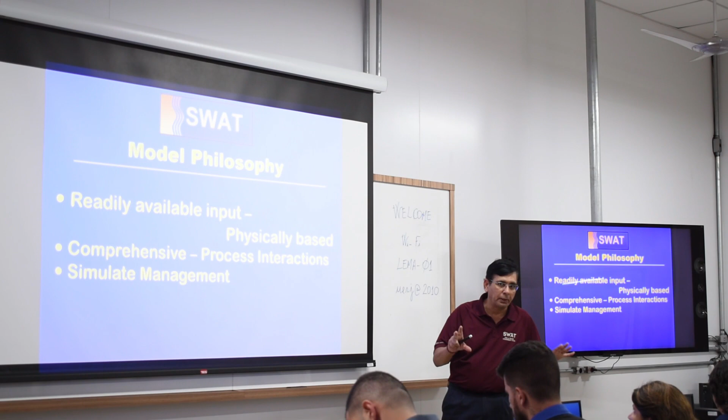Our model is also physically based, meaning it's spatially explicit. Your landscape, later in the slide I'll show you how you can divide your landscape into land management units. So it is spatially explicit on the landscape to capture the rainfall, runoff, vegetation, and soil processes.

The main takeaway message from this presentation today is how comprehensive the SWAT model is, meaning how you could potentially look at various aspects of land management and the interaction of land management with the natural processes happening in the real world, and the simulation of alternative management, meaning simulation of scenarios. How can you run different scenarios to look at 'what if'? What happens if I change my land use from agriculture to pasture, or pasture to forest, or forest to urban? How does that make an impact on water quantity and quality, for example?

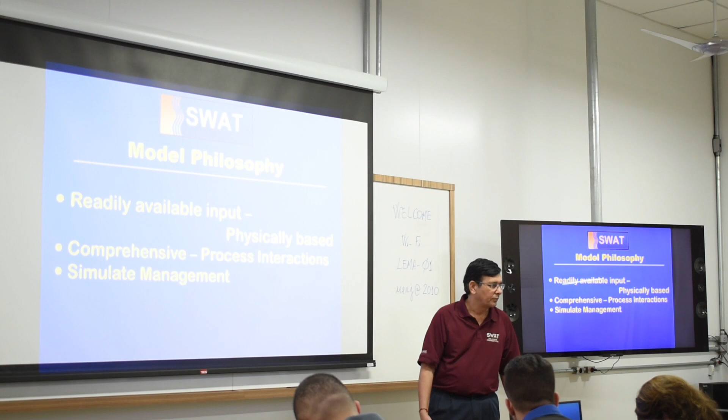So developing a model such as SWAT is not just to prove the model works. Yes, you do need to do that to gain confidence in your model, but the main reason you develop a model is to run alternative scenarios. For example, if Anna wants to put a monitoring station, where is the best place to put it? If you want to put a meteorological station, where is the best place for that? Where is the data gap, for example?

One of the PhD students in Belgium used the SWAT model and advised the government of Belgium on where to collect data for pesticides. Their interest is water quality, drinking water quality. How good is the quality of your water, measured by pesticide levels in the river, so they can identify health risks.

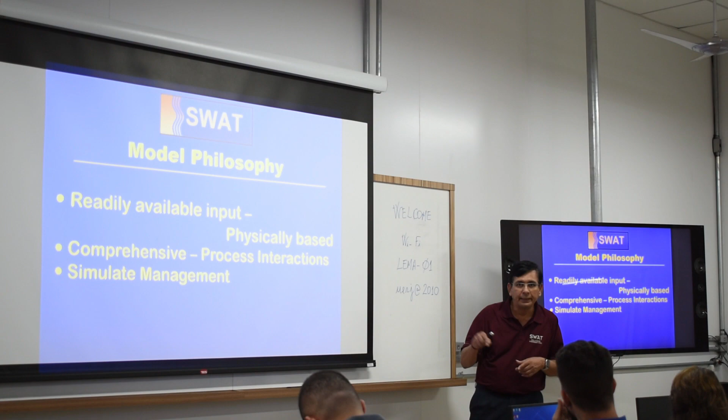To do that, pesticide data is very expensive to collect and analyze, each sample costs more than $100, so there's only so many samples you can collect. She used the model to identify the locations where you can collect data, how many times you have to collect data, when to collect it, where to collect it, and what to collect. So the model can be useful in this manner, to set up an experiment so that you can look at the spatial and temporal variability and try to capture that, and be able to simulate land management based on the impact of what's happening.

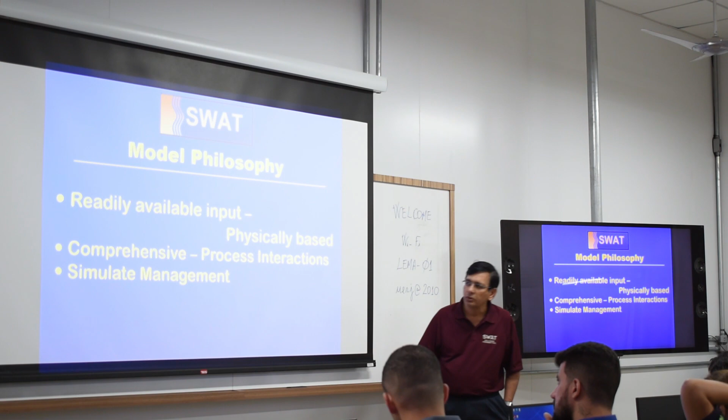Because the land is changing constantly, it's not constant. Your topography may be kind of constant, your soils kind of constant, right? It's not changing unless you change the topsoil or things like that. But your weather is changing, your temperature, your precipitation events will change. Your land use will change actually. So the main driver for any land management is going to be weather and land use. Your elevation and soils are not that dynamic. They may change once in 50 years or once in 20 years, not from year to year. Whereas weather and land use will change almost on a yearly basis. Land use maybe once in few years, maybe once in 3 or 5 years, but weather every year changes. So that's what we are trying to capture: the variability of your landscape and how that might impact the quantity and quality of your water.

Okay. Stop me anytime if you have any questions, okay, please.

One of the fundamental philosophies is that we want to develop the model with a simple understanding. We don't understand everything what's going on actually. The real world is very complex, right? So what is a model? Model is the simplicity of abstraction of reality. We are trying to capture the real world processes through mathematical formula in a computer simulation model. But we may not know everything what's going on. Mother nature is very complex, right? So we try to capture the best of what we understand and we make assumptions.

We make unknowns, right? Like constants and coefficients and things like that to represent the process, but that doesn't mean the model is perfect. Model is always an opportunity to improve as we gain new knowledge. So we try to keep it as simple as possible, but still follow the law of physics and chemistry. We can't change the law of physics and chemistry to make simulation models, so we still use those in our process.

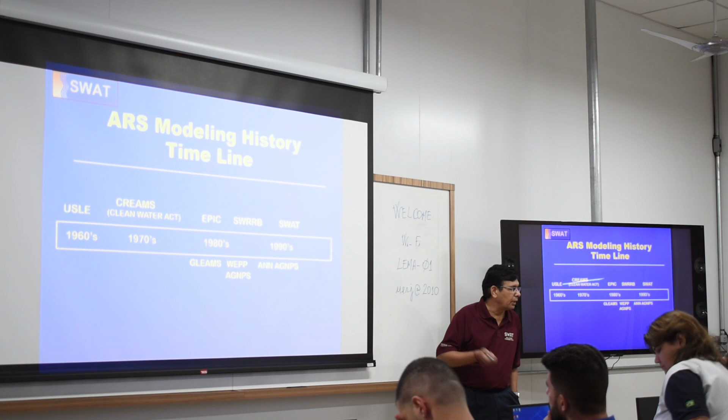It's based on a law that was passed in the US called the Clean Water Act, on how to protect your water resources. So they realized around 1970, 72 to be precise, that we need to think about the quality of the water, more than quantity of the water, because you can have all the quantity in the world, but if the quality is not good, that water is not going to be good either. The amount of resources you have to spend to clean that water is not going to be worth it at the end of the day when you need to use that water.

So protecting your quality of the water at the source - source meaning where it is produced. When there is a rain, and that rain is going to produce runoff, at that source itself you have to protect your quality of the water. If you don't protect it there, it's not going to be that great when it comes to the river or the lakes or the ocean and things like that.

Then in the 1980s, we had a model called EPIC. And then in the 1980s, we had SWRRB, and then eventually this converted into SWAT. Even today, this model developed in the 1980s, EPIC, is the most used model in the world actually. If you look at every model in the world, this is the most used model in the world.

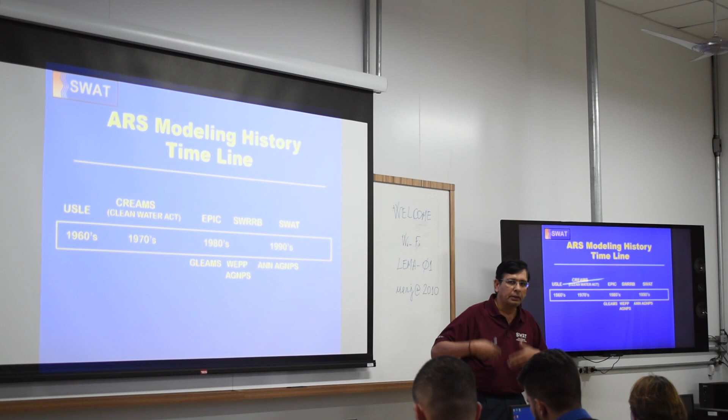The data is evolving. As we find something, there's a data gap, a knowledge gap. So we go back to the drawing board, go back to them, and say we need this data, or we need to collect more data for a particular time period of the year, because that's a rainy season or non-rainy season. As we ask for more data, they go collect it, then we go back to modeling, develop the model, apply it, and answer the question. It's been continuously going on for the last 30-plus years.

So modeling is about what you want from the model, what questions you're trying to answer, and whether you have enough data to answer that question. Those are the things that take time and resources to develop a model.

We also have a few other models like these shown at the bottom. Some of them no longer exist. One of the sad stories in model development is when the model developer retires or passes away, the model dies with them. If there's no caretaker, no big organization behind it, normally it doesn't survive. For example, Gleams—when the author died, the model didn't survive either.

But we took the best science out of Gleams and incorporated it into both EPIC and SWAT. Gleams is a pesticide model, developed for pesticide movement. So we took the pesticide component from Gleams and incorporated it into our models. We take the best of each model where available and integrate it with our model, so when those models become obsolete, our models can still carry on.

So one of the things we're working on is making sure we have a succession plan, meaning when we retire or go away, there will be somebody else to take care of it. We started this plan 10 years ago. If you know someone is going to retire 10 years ahead, you start planning then. We now have somebody taking care of the EPIC model, and we're working on our succession plan between myself and Dr. Jeff Arnold.

Jeff and I are the two main people working with the SWAT model. Jeff is planning on retiring in another 5 years, and I may retire in 10 years. That means we need to have somebody come and take care of that. So we are working on that transition plan right now.

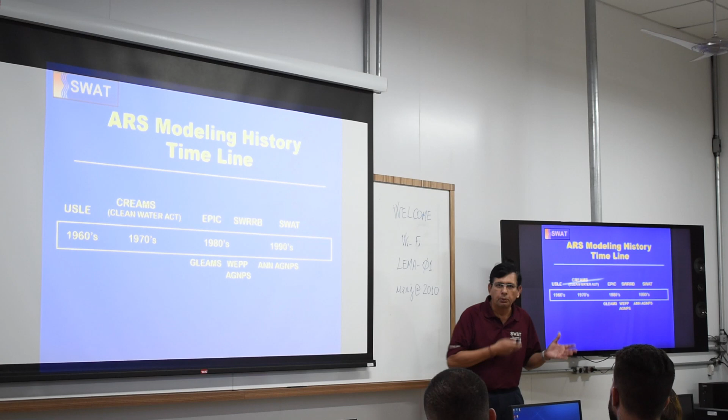These are the 4 models we currently manage, maintain, and actively research today. EPIC, which is a field scale model, and Almanac, also a field scale model. Almanac is mostly a research model, not a practical tool—researchers use it to develop parameters for other models. It's much more primitive; you need a lot of field data to operate it, so it's mostly used by scientists, not practitioners.

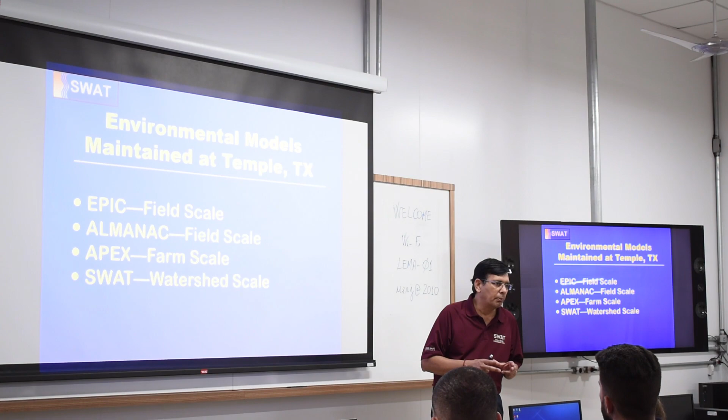Then there's APEX, a farm scale or micro-catchment model. When I say micro-catchment, I mean something like 5 to 10 square kilometers, a very small catchment. If you want to model that, you can use APEX. But APEX requires a lot of data—it's much more data intensive than SWAT because you're capturing field by field within that micro-catchment, so you need more data, typically from experimental watersheds.

In that particular situation, you should be able to use APEX. The only thing is you can't scale it up to a very, very large scale, like a river basin, for example.

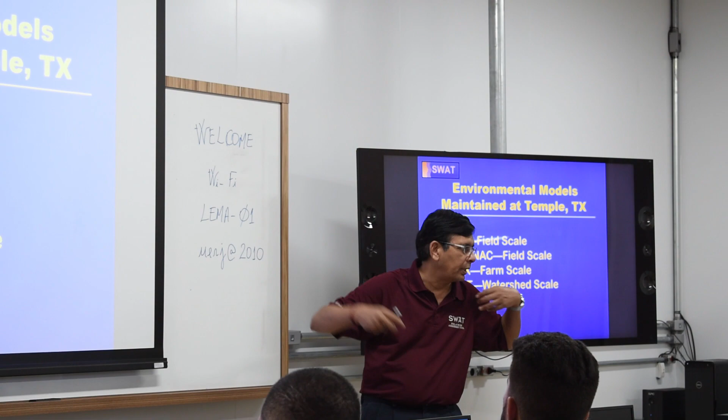And finally, the SWAT. SWAT is a watershed scale or river basin scale model. Actually, you can model all the way from a few hundred acres to thousands and thousands of square kilometers.

That doesn't mean it is less accurate or more accurate at any particular scale. The scale is dependent on your quality of data. If your quality of data is really, really good, you can capture a very small area all the way to thousands of square kilometers.

For example, if you have a 1,000 square kilometer watershed and you have, let's say, about 2,000 farmers managing land, everybody is going to manage differently. So if you have a sugarcane field, not everybody is going to plant on the same day, not everybody is going to apply the same amount of fertilizer, or not everybody is going to harvest on the same day.

Knowing that detail, not only that, if you are simulating for 30 years of time period, we don't know what happened 30 or 25 years ago. How did they manage the land? How are they managing it today? So that kind of detailed information is very, very difficult to obtain.

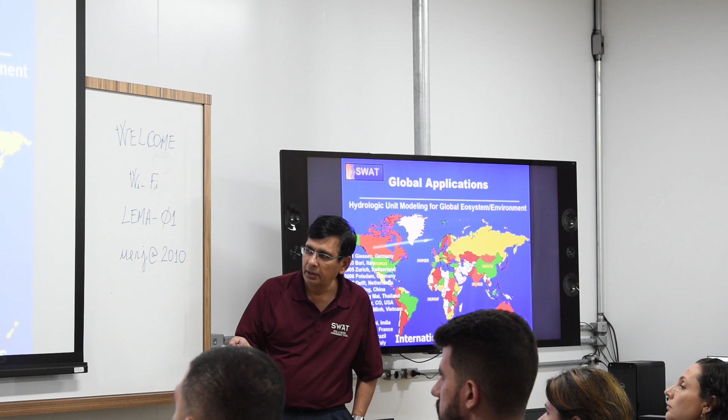One of the reasons this model, the SWAT model, is very popular is because of the conferences and meetings that we conduct, like workshops and things we conduct. We started our first conference in 2001 in Germany, and then we used to do it every other year in Europe, but now we are doing it every year. Now we are doing 2 conferences per year, actually.

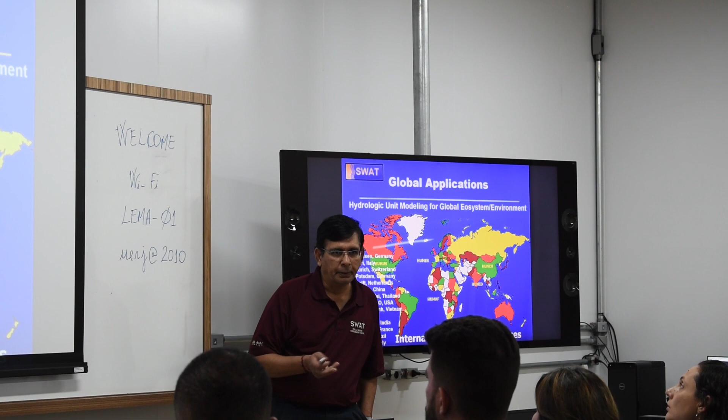SWAT is a daily time step model, meaning it takes your daily precipitation and looks at your land use, the soil, and the topography to estimate how much runoff, how much pollutant, or how much pollution from those runoff is attached to that water.

We also have a sub-daily or hourly simulation model. For that, you need an hourly precipitation data set. You can't take the daily rainfall data and try to run it for hourly, because we don't know which hour the rain really happened. Let's say you had rain yesterday, the rain happened from 6 to 7 o'clock in the morning. We won't know that if you don't capture the time of the rain, the intensity of the rain, whether you had 30 millimeters or 50 millimeters in half an hour, or 30 millimeters or 50 millimeters over 2 hours. That changes the intensity.

The intensity is what's going to change in terms of runoff, soil saturation, and so forth. You can run the model at daily or sub-daily time step, and for literally any number of years. Currently, we have data for the past 100 years and the next 100 years using climate change projections, so you could potentially run the model for 200 years today.

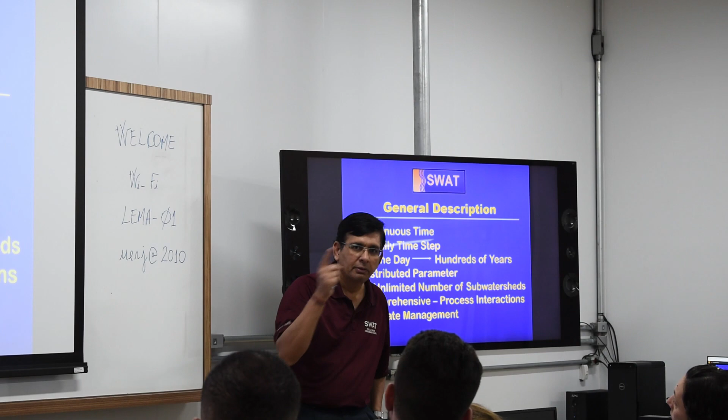So not applying fertilizer as an input into the model - that one input could cause a chain reaction that impacts your model output in various ways. That's where process interaction comes in. It interacts with different processes, trying to capture the chain reaction of consequences of action. If you take a certain action, you're going to see consequences, right? You decided not to carry an umbrella, then if it rains, you're going to get wet - that's an action. It's the same thing - there's a reaction to every action here.

All those reactions get fed back into the model, so that if there's a mistake in the model input, it's going to be reflected and shown in various places within the model output. Does that make sense? And finally, the simulation of alternative management is key here, meaning running scenarios.

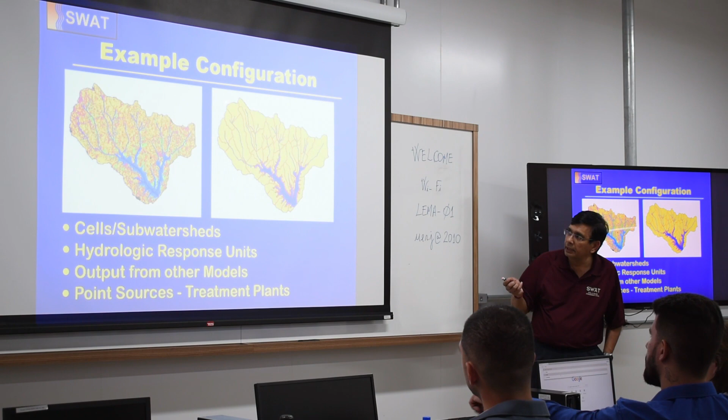You can also have sub-watersheds based on topography. This red line you see here is a sub-basin. That means any rainfall within this red area all has to go through this river to this outlet only. In other words, rain that falls here cannot go another way. It has to follow the path based on topography.

Then we take the sub-watersheds, or the cell, and divide that by what we call the hydrologic response unit, or HRU. HRU is a unique combination of land use, soil, and slope. So we take the GIS layers, the land use layer, the soil layer, and the slope layer, overlay all three maps, and look at what is the unique combination of each pixel, then combine them to come up with a hydrological response unit.

Meaning whatever happens in that parcel, you are going to have the same response, because it's the same soil, same land, same topography. I'll describe this in a bit more detail in the next slide.

The hydrologic response unit is the smallest unit in the SWAT model, meaning it's the basic building block. If you're putting together a puzzle, you need a basic small unit, right? So HRU - you put together a bunch of these HRUs and that becomes a watershed. A group of HRUs within a subbasin becomes a subbasin, and a group of subbasins becomes a watershed.

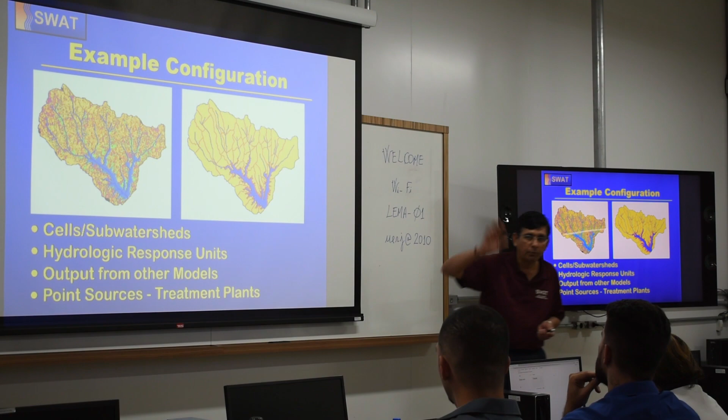This is more important where, for example, you want to model the state of Sao Paulo and water is coming from Brasilia or Minas Gerais or other places. Along the border, you don't want to model what's happening in that state - you just want to drop an ANA station and use that as a boundary condition. Then you can model only what you want, or model below a lake, knowing how much water is released from the lake as the boundary condition, and model downstream of the lake rather than upstream. So you can customize within the watershed, starting and stopping anywhere to model with SWAT, as long as you establish the boundary conditions. Does that make sense?

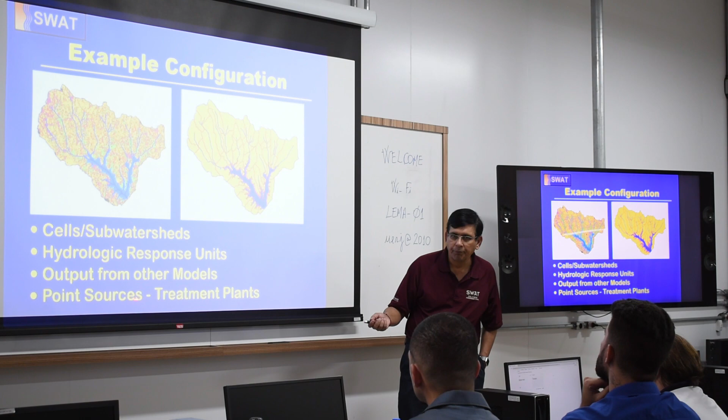SWAT is not only a non-point source diffuse pollution model, it can also handle point sources. What is a point source? It means municipality or industry wastewater treatment. If a city is putting out pollution and you have wastewater coming from that, you can incorporate that in the model - anything that gets directly discharged into the river, this blue line you see here, by a city, municipality, industry, or mining. So the model handles both non-point and point sources.

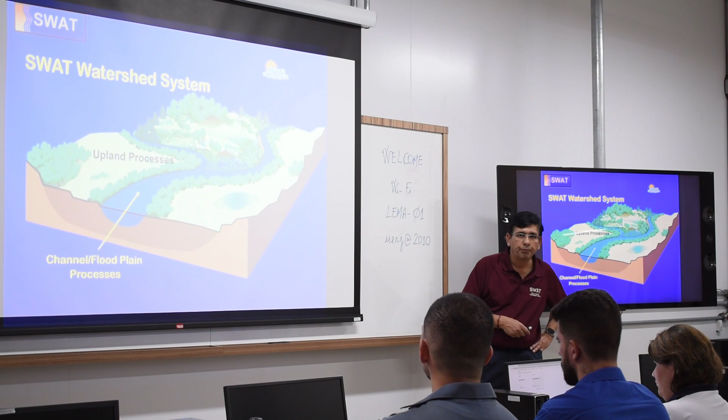So HRUs are virtual. But HRUs from one sub-basin to another sub-basin are 2 separate ones. Even though the same land use, same soil, and same slope occur in this sub-basin and in another sub-basin, there will be 2 separate HRUs.

But within that sub-basin, they will be combined. Even though they are 2 separate parcels, 2 separate land units, they will be combined as one for simulation purposes. Does that make sense?

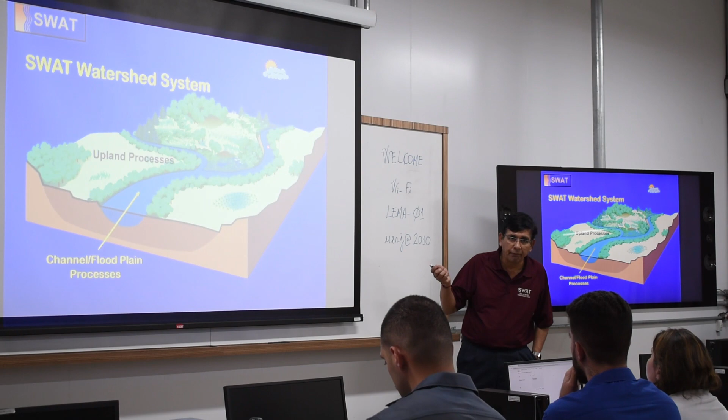Once all the simulations are conducted by HRU, those outputs dump into the river and the river routing process takes place. And the point source can be added at that time.

So just to explain this HRU concept, let me go through one more example. Let's say this is a watershed, and this watershed has got about 20 sub-watersheds, 1, 2, 3, 4, and so on, all the way to 20.

Let's take one sub-basin, sub-basin number 18. In sub-basin 18, 28% is rangeland on a sandy soil, 51% is pasture land on a silty soil, 16% is forest on a sandy soil, and 4% is agriculture on a silty soil.

I kept it very simple, meaning one land use and one soil. You could have rangeland on 10 different soils, and the GIS will automatically capture that for you.

So they can be in different slope. I'm assuming they are all in one slope here, just to give you a simple illustration, a simple example.

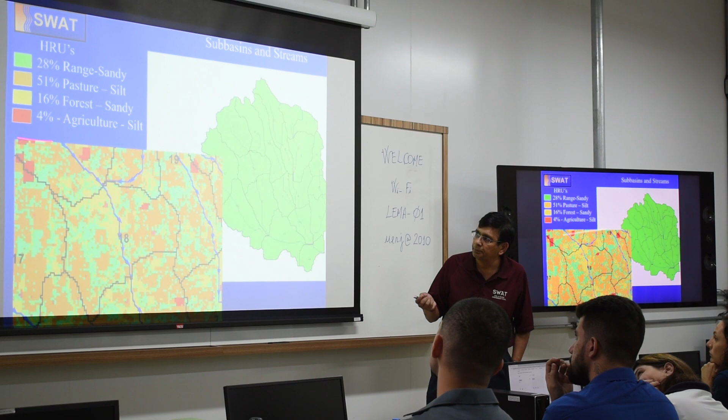So let's just focus on the forest, which is yellow in color here. If I just look at the forest land, these are all the forest lands in sub-basin number 18, and all of it is in the same soil, same slope. So as far as SWAT is concerned, it is one HRU.

Regardless of whether that forest is here or next to the river, it's the same. Within that sub-basin, they are all simulated as one HRU. That means in the output, I can give you only one output for forest. I can't tell you the amount of erosion here versus there, because they are all simulated as one HRU.

But we know that is not true, right? Some forests are managed, some are not managed - natural forest and plantation forest. In plantation forest, you harvest every 15 or 20 years.

Let's say you are planting eucalyptus - every 7 years you harvest it. The natural forest you do not harvest. So if I say I want to harvest my forest, it's going to harvest everything here because they are all in one HRU. There is no differentiation.

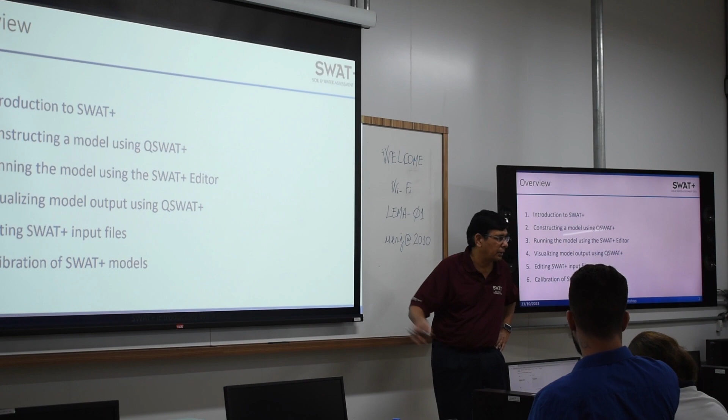All of this stuff, we have literature, documentation, manuals, and things of that nature. And we may have videos that we went through all of them, so if you are interested, we can share that with you.

So again, SWAT is nothing but a model for a small watershed to a river basin, to simulate the quantity and quality of surface and groundwater, to predict environmental impact on land management and climate. That's in a nutshell what SWAT is all about. It runs on a daily time step, and it's got a comprehensive simulation of landscape process and in-stream process.

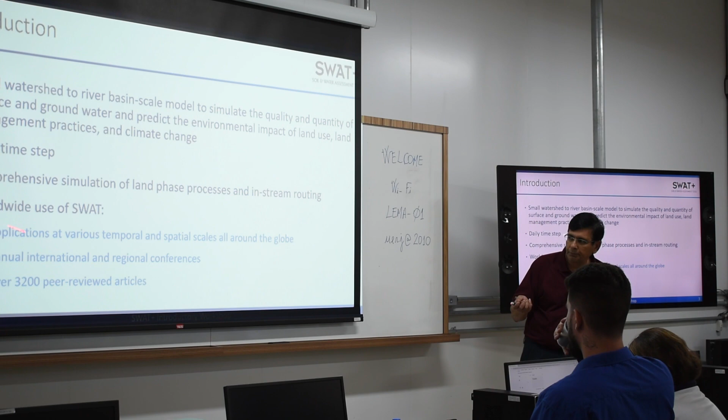It's one of the largest used watershed models around the world today. We just crossed, I know this is an old slide, 6,000 peer-reviewed publications. If you look at another model in the same family, like other watershed models, you may be looking at maybe 200 papers at most. Whereas SWAT, we have crossed 6,000 peer-reviewed publications.

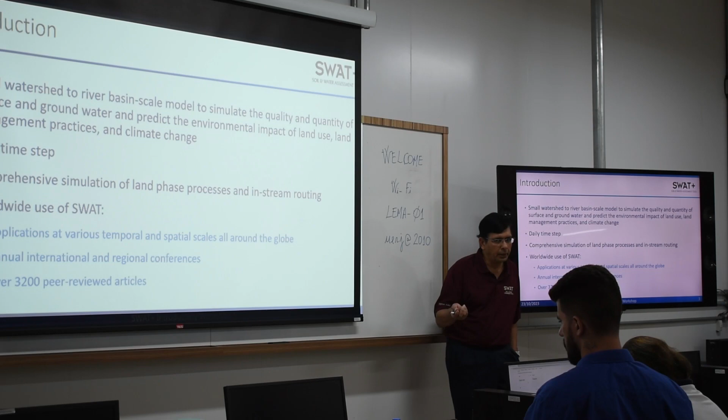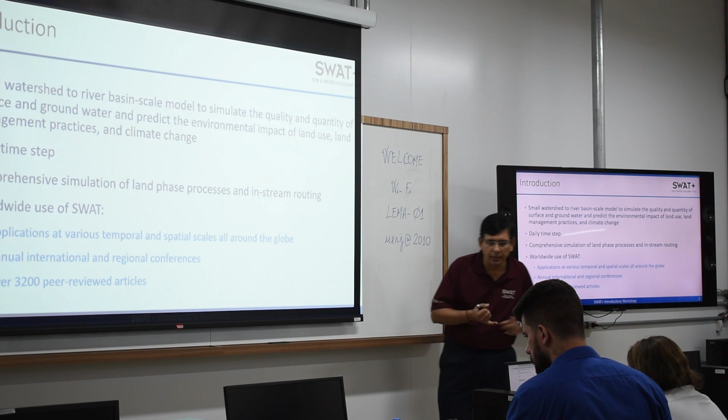And we have published in more than 400 different journals. The model has been published all the way from social science to economists, to environmentalists, ecologists - you name it, it's been used in so many different disciplines. That's one nice thing about SWAT: it brings in different disciplines, all the way from soil science, soil chemistry, soil physics, to plant agronomy, plant pathology, pesticides and things like that. And then civil engineering topics like hydrology, hydraulics, dam operations, dam management, energy management. So it definitely brings multiple disciplines all together in one model.

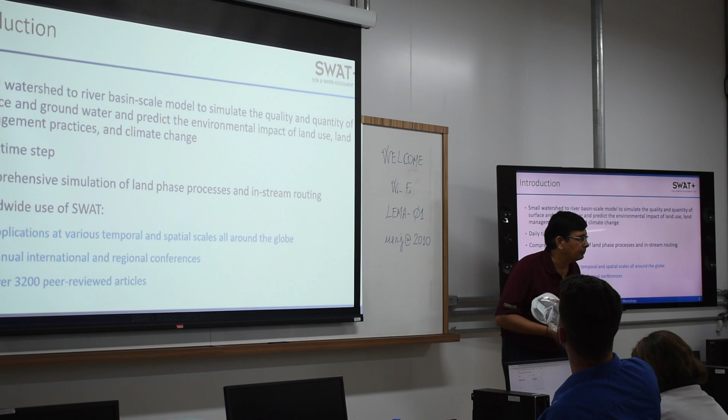And we know not any one person can master all this stuff. That's why a model like SWAT is really a team model with different disciplines, different backgrounds. We all come together and work together to solve the problem. And we have also estimated there are close to about 8,000 masters and PhD students using this model worldwide every year to solve a problem or understand a problem.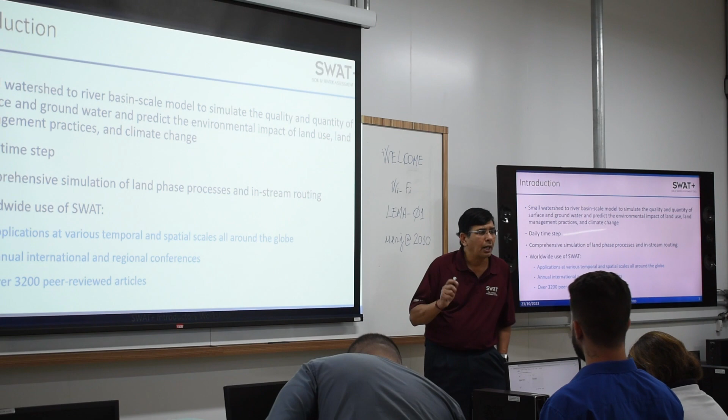That's why we have this 6,000 peer-reviewed publications - and I'm talking about 6,000 only in English journals. I know you all publish in a lot of Portuguese journals, Spanish journals and other journals. If you start taking Chinese journals into account, then that number has exceeded more than 10,000 by now.

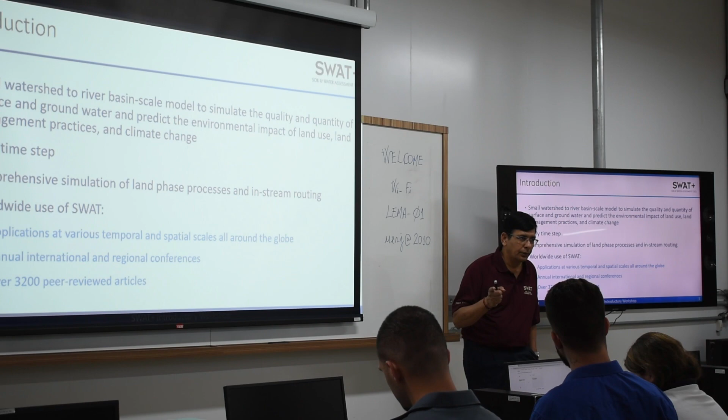We do have a review paper published by Danielle, and she has collected all the data - not only the peer reviewed publications, but all the masters and PhD dissertations - and documented that in the paper. That paper is available on the SWAT website, and you'll be able to go there and take a look at that, and actually see what's happening inside Brazil, for example.

So just to give you an overview, over the last 30 to 40 years, the GLEAMS which I told you about - the pesticide component - the CREAMS is the rainfall runoff model, and the EPIC is the crop growth model. So we combine all those three different components. That's what we're calling now SWAT. SWAT is a landscape process model, and it has both the routing and the in-stream water quality component called Qual2E embedded in it.

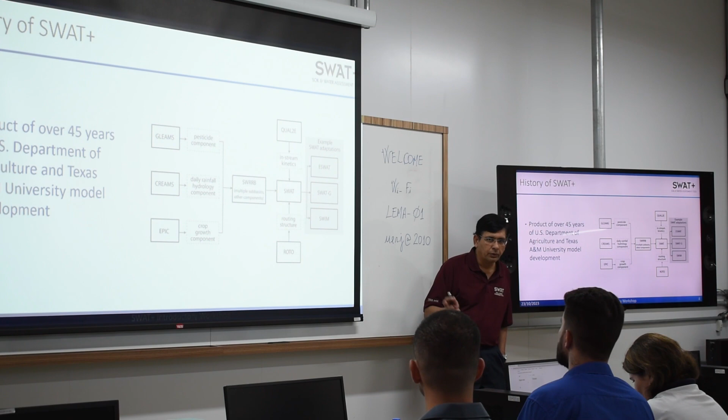And there are different versions of the SWAT model - there's a European SWAT, SWAT for Germany, and so on. So there's a lot of customization because SWAT is an open source public domain model. Anybody can use this model, anybody can download it. All the source code is openly available.

So what do you need in terms of climate as an input? Climate is an input into the model. What kind of climate input do you need? You can use precipitation, daily or hourly or sub-daily, depending on whether you're going to run the model on a daily time step or sub-daily time step. And you need minimum and maximum air temperature. The rest of the data is optional - relative humidity, solar radiation, and wind speed are optional inputs. If you have them, you can make use of that.

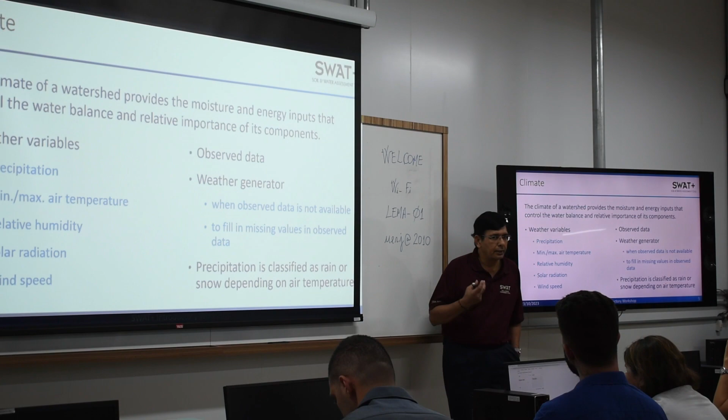If you don't have them, you can simulate it based on historical statistics, because SWAT has a built-in stochastic weather generator, a statistical weather generator. It can generate your weather for every day based on historical weather statistics. So that's what this weather generator comes in as - it can generate all these weather variables.

So if you're running a scenario, you don't care exactly, because weather or climate is a random phenomenon. It's just stochastic - we never know what's going to happen tomorrow in terms of rainfall. We can predict there's going to be rain, but the intensity, duration, and amount of rain we don't know. We might say roughly 20 millimeters tomorrow, but it could be 40 millimeters, depending on atmospheric changes.

So the weather generator can generate the weather statistics. It can never predict exactly how much rain is going to happen, but it can say that over 30 years, the same statistics can be regenerated - like the average rainfall, average number of days of rainfall, how many days of consecutive rainfall. All those statistics it can regenerate. So that's what the weather generator is - stochastic statistical weather generation.

So you can use this to generate weather, or you can use an observed dataset. If you have an observed dataset, you know how much precipitation and temperature occurred on that particular specific day of your simulation. If you are going to do calibration with the SWAT model, you have to have at minimum precipitation and maximum/minimum temperature. If you have this data, it's great. If you don't have it, it's okay - it's not a big issue when it comes to calibration. For calibration, these two are most important.

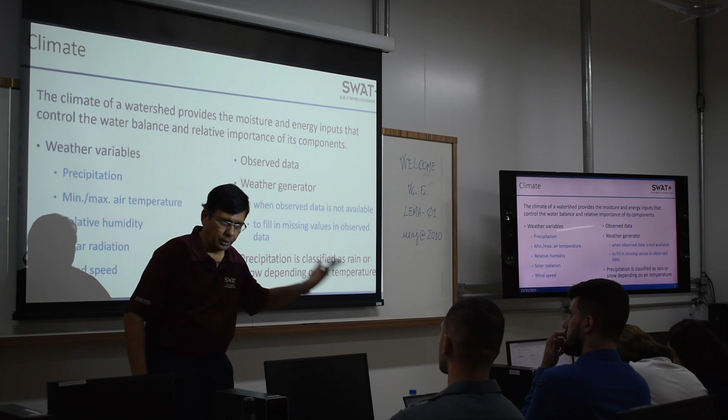Does the weather generator use global information or local information? It depends on what you have. If you have local information, you can generate your own weather coefficients or weather statistics. We provide the global data - the global weather statistics data - but you don't have to use our data, you can generate your own weather statistics. Say, for the Amazonia Basin, within it you could say just for Belém I'm going to use this data to generate my weather, and for the rest I'm going to use the global data. You can do that too - you're not limited to only global or only local, you can also have combined information.

If you're in an area that has a lot of snow, the model can automatically convert your precipitation into snow based on temperature. You can specify at what temperature your rainfall becomes snowfall, and it will automatically convert the data for you.

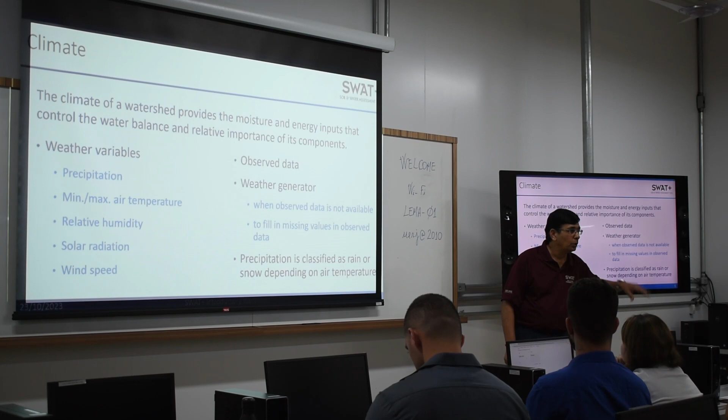When you provide input, you need to provide it in precipitation equivalent. Let's say next week there's snow, and the snow was 200 millimeters. 200 millimeters of snow is not equal to 200 millimeters of rainfall. It could be just 10 millimeters of rainfall equivalent. So you have to always convert your snow into the rainfall equivalent when you provide input into the model.

On the landscape, on the land process, we have hydrology, plant growth, erosion, nutrient, pesticide, and pathogen. We are slowly adding heavy metal and salt as new components in SWAT Plus. It's not there today, but it will get there eventually. And land management is, of course, the key here.

This is on the landscape, which is the HRU process. In the watershed, in the river process, we have the instream routing of sediment, pesticides, pathogens meaning bacteria, heavy metals, and salts.

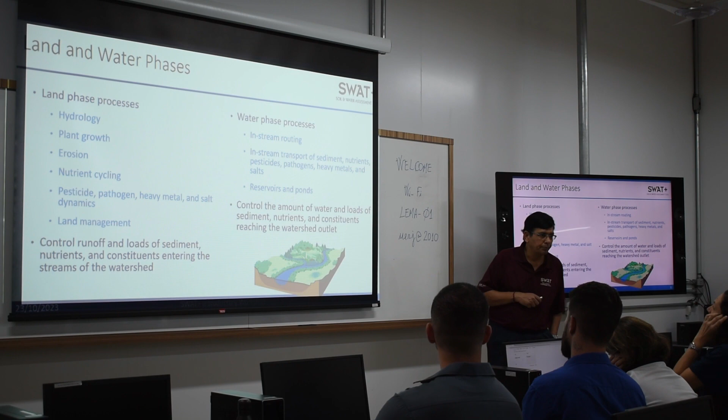The next few slides I'm going to go through to talk about the hydrology and the water quality, how it's simulated in SWAT.

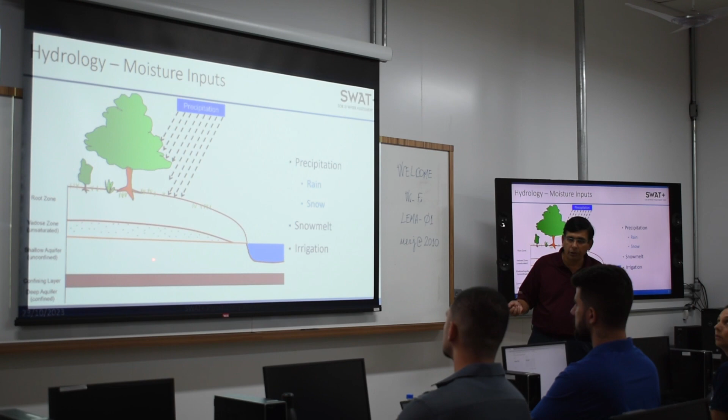So you take one HRU. This is an HRU which could have a tree or annual crop like sugarcane or corn or soybean, and you may have grassland and so on. So when there is precipitation, you have the soil. You can have up to 10 soil layers, 10 soil horizons. And then we have an unsaturated zone, shallow aquifer, confining layer, and deep aquifer. Conceptually, this is how the HRU is divided.

The HRU has the plant, soil, and groundwater process.

Let's say you had rain today - that could be rain or it could be snow, depending on temperature. If you have rainfall, that could be from melt if there's snow, or it could even be irrigation, applying water from canal or from aquifers. So that rain is converted into two components: evaporation and transpiration - soil evaporation and plant transpiration.

For evaporation and transpiration, we use one of three equations. You can choose which equation to use within the SWAT model: Hargreaves, Priestley-Taylor, or Penman-Monteith.

The output from SWAT will give you how much is the evaporation from the soil and how much is the transpiration from the plant - you get both separate components. Previously you used to get only ET; in SWAT Plus you'll get both separate components. So if you have satellite data to capture that, you'll be able to calibrate against satellite data on evaporation.

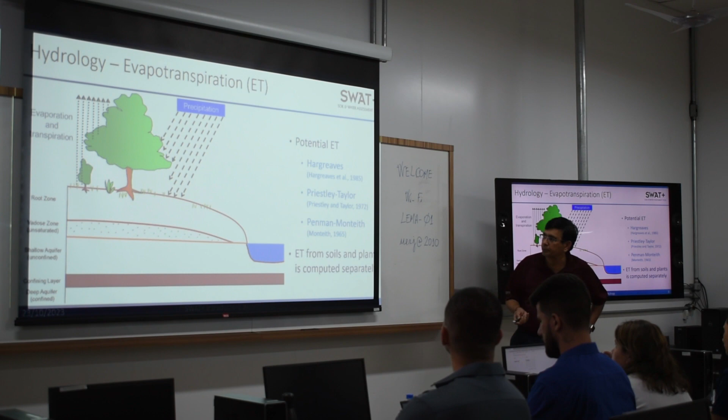Once the evaporation is calculated, then we calculate the runoff using the curve number technique. The curve number is not a constant - it changes on a daily basis based on the previous 5-day rainfall event, which determines how saturated your soil is. If the soil is highly saturated, you'll get more runoff. If the soil is less saturated, you're going to have less runoff.

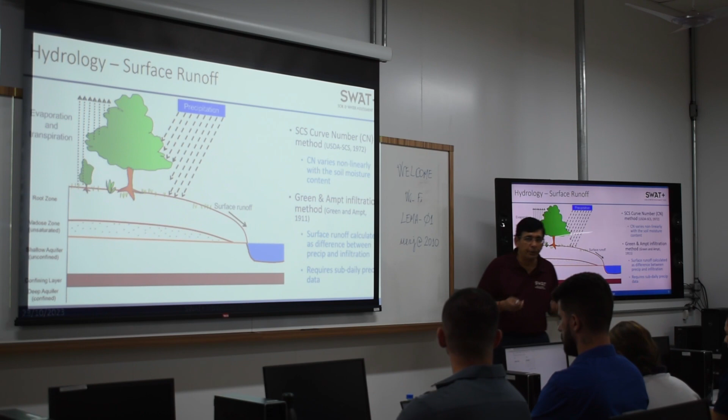If you are using a sub-daily time step, meaning hourly rainfall, then you can use the Green-Ampt infiltration equation, which calculates runoff and infiltration through a physical equation. To use Green-Ampt, you not only need sub-daily temperature and precipitation, you also need a very good soil database - soil properties are very important for this equation. Whereas the curve number equation needs only one soil parameter, the hydrological soil group A, B, C, D, Green-Ampt requires pretty well-defined soil parameters.

Once the water is divided into runoff and ET, the rest goes as infiltration. That infiltrated water goes through layer by layer. You can have up to 10 layers. Once layer 1 is saturated, it goes to layer 2, layer 3, layer 4, and any excess water will come as lateral flow.

So for example, if you have excess soil moisture in each layer, that water can come as a lateral flow back to the river. And any excess soil moisture can also go vertically. So it's a two-dimensional model, going vertically and horizontally at the same time.

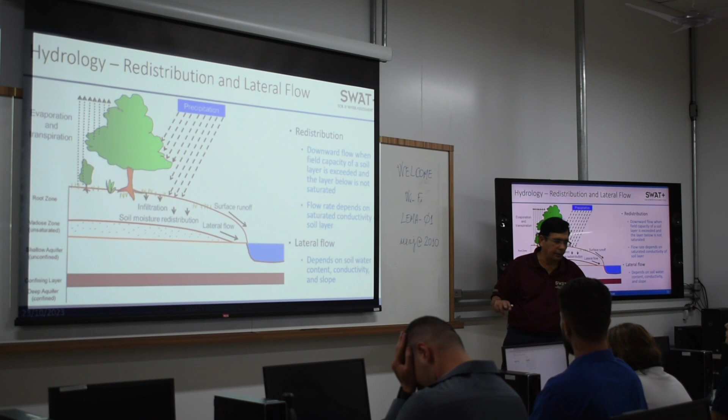Once the water percolates below the soil layer to a shallow aquifer through the unsaturated zone. In the current SWAT, we don't have a detailed groundwater model. It's a very simple bucket model. If the bucket fills up, it goes to the next, and the next, and so on.

Whereas in SWAT Plus, we are bringing in a physically based groundwater model into SWAT. We are taking advantage of that model so it can simulate the real process of the unsaturated zone. That means you need more data. The simplified model doesn't need much data, whereas the more detailed model requires more data about your unsaturated zone, like the thickness and how water transports through it. All those properties are required.

Once the water reaches the shallow aquifer, that water can re-evaporate, undergo capillary tension, or return back to the river as base flow. It can also go to the deep aquifer.

All these things take different times. This could be in hours, this could be several hours, this could be an hour or a day, this could be several days, and this could be weeks, and this could be years. So the movement of water differs for different processes. They don't all happen on the same day or same time.

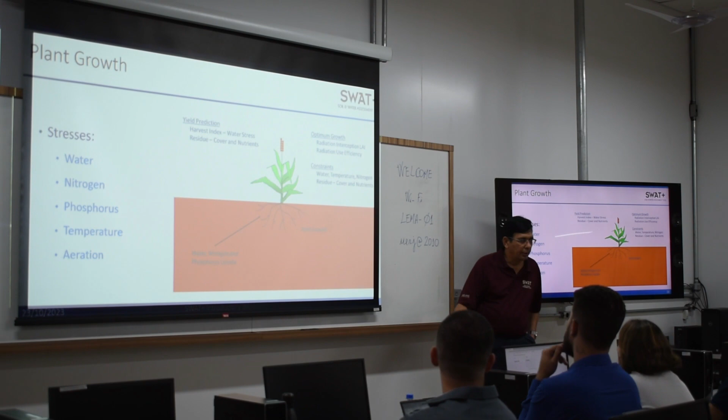As an output, you'll be able to see how much stress there is. So if in the real world people are getting say 20 tons of sugarcane per hectare, and the model says only 10 tons, the first thing to look at is what is stressing or limiting growth, then make sure your inputs are correct. If the reported yield is 20 tons and you get 18 or 22 tons, you're within the margin of error, within 5-10% of observed, which is acceptable. So you want to look at the stress factors and the amount of biomass and yield to make sure they are reflective.

There are many ways to calibrate the model. It's not just stream flow you need to calibrate—you can calibrate against ET, soil moisture from satellite, crop yield, vegetation yield, or biomass. Some of these are time series data, some are annual average data. You want to make sure you are right for the right reasons across all aspects of the model, not just hydrology. Hydrology alone is generally only 20 to 30% of your entire water budget.

Almost 60% of your water budget is evapotranspiration. If you're wrong on your evapotranspiration, you can still be right on your hydrology, but that doesn't mean your model is right, especially when running scenarios. If you change one crop to another, your model may not be reflective because your ET is not correct. So whenever I run the model, the first output I look at is crop vegetation, to make sure it's growing as expected before looking at anything else. You don't have to be an expert in agriculture, just know enough about agriculture yield, forest biomass, and things like that.

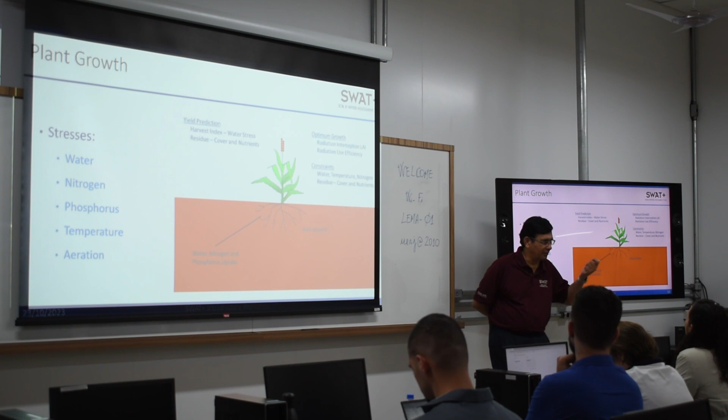Potassium also affects growth. If you look at people's height today compared to 20, 30 years ago, we are shrinking globally. That's because we don't have enough potassium in our water or nutrients. Potassium intake is shrinking.

The erosion process is key here. We use the soil loss equation, the Universal Soil Loss Equation (USLE), modified to incorporate the runoff, the peak flow, and the area of the HRU. The rest of the factors are the same as the universal soil loss equation, except these added factors, which make it dynamic, because every day you get how much runoff. So USLE is not a constant; it's normally used for annual estimates. Here we use the same equation but on a daily basis, modified to incorporate runoff rate, total runoff, peak rate, and the size of the area.

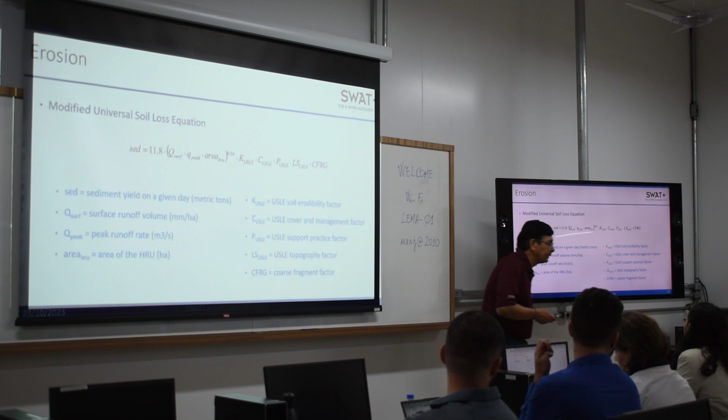All the coefficients in the exponent were derived from field experiments, from the field data.

Every day when there's rainfall and exchange happening, the plant absorbs water through evapotranspiration, and when it absorbs water, it also absorbs soluble nitrogen — nitrate is what is taken up. Every day, organic matter can become ammonia, the ammonia undergoes nitrification, an oxidation process to nitrate, and then that nitrate is taken up by the plant. Sometimes the plant itself, like legume crops — soybean, any kind of beans, alfalfa, grass — can incorporate nitrogen into the soil, and the model automatically accounts for that.

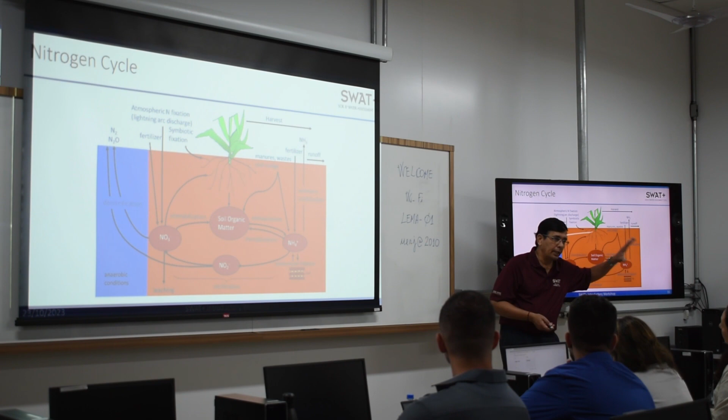You also have a problem with leaching. The nitrate can leach to the groundwater, so your groundwater can get affected. If you're going to use the groundwater for drinking purpose, and if you're applying too much nitrogen, your drinking water can be affected by excess nitrogen. For example, in the US, in Iowa, in the 1930s and 1940s, the groundwater was clean. You could take it and drink it directly. Today, it's so polluted because of all the application of fertilizers in the last 30, 40, 50 years. The groundwater is much richer in fertilizers than what you apply on the land. You can take that water and simply apply it on the land, and you get enough fertilizer. You don't have to even buy fertilizer. That's how much fertilizer is in the groundwater now.

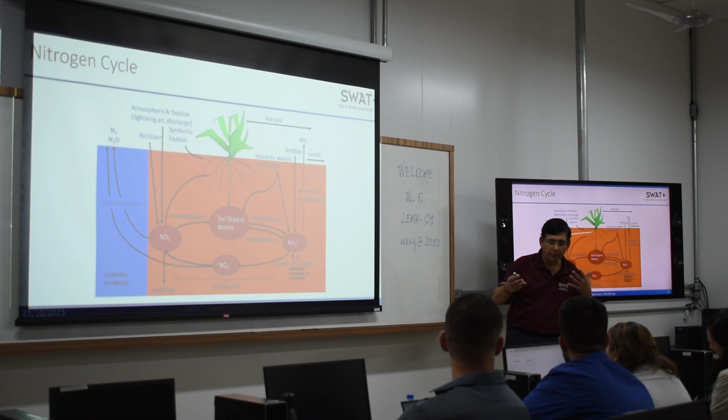You can take your groundwater and analyze it, and you'll know over the years if it's continuously, steadily increasing over the period of time. And of course, when you harvest plants, when there is runoff and sediment, you'll also lose nitrogen through that. Typically it's about 15% of your fertilizer lost through runoff and sediment, because farmers are not going to apply exactly when the plant needs it. They apply it hoping the plant will take it. But in between there is an environmental process like rainfall, runoff, sedimentation. They may capture as much as 15% of the total nitrogen that we apply.

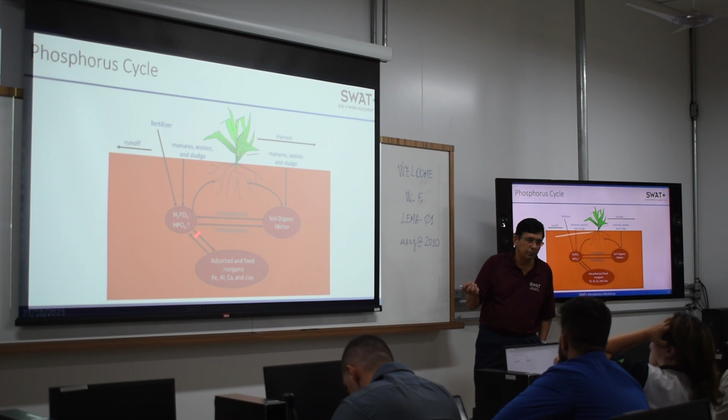Typically, you need 1 kilogram of phosphorus for every 8 kilograms of nitrogen. If you apply in a different ratio, you will get more phosphorus staying in the soil, because the plant cannot take it just because it's available. The plant can take it at a 1:8 ratio, in general, not every plant, but in general. So the problem is when you apply manure, you have more phosphorus than nitrogen. That means if the field is only organic farming and you are going to apply only manure to grow your vegetables or your crop, you are applying excess phosphorus. That means over a period of time, your soil is going to become very high in phosphorus.

That's why you see all this algae in the lake—it's because of phosphorus, not because of nitrogen. Excess phosphorus is what's causing the algal bloom in the lakes. So when you fly over the Netherlands, you will see in the summer it's everywhere green. It's not agriculture, it's all water with algal bloom because of animal manure. So animal manure is one of the biggest sources of excess phosphorus in the rural watershed. In the urban watershed, we also apply phosphorus in our lawns to maintain grasses and things like that. It also causes problems.

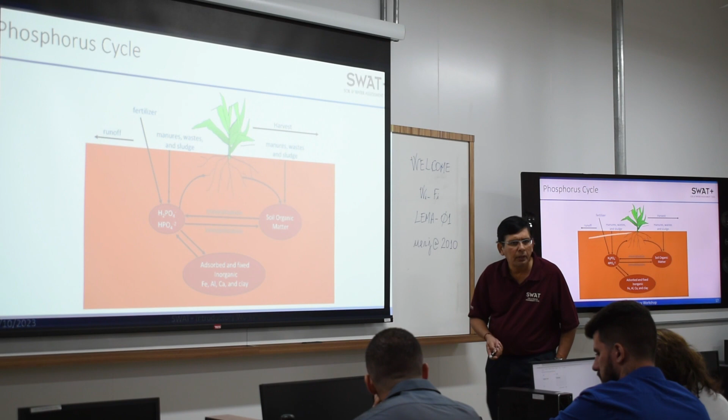More recently, studies in Denmark have shown phosphorus leaching into groundwater. Denmark produces so much cheese and milk, they're the world's number one producer, with so many cows for a country of that size. Over the last 50 to 60 years, phosphorus has started reaching the groundwater. So in SWAT, we modified the equations to allow phosphorus to go into the groundwater. Previously we did not, but now if you know there's a watershed where phosphorus is moving through the soil into the groundwater, you can activate that in the model.

Pesticide. SWAT is one of the most used models for pesticide registration, because every pesticide needs to be registered with the environmental agency before it can be sold in the market. There are three kinds of pesticide: a nematicide to kill insects inside the soil, a weedicide that kills grasses, and an insecticide that kills pests and protects the crop.

So here we apply the fertilizer or pesticide either on the soil or on the leaves, depending on the situation.

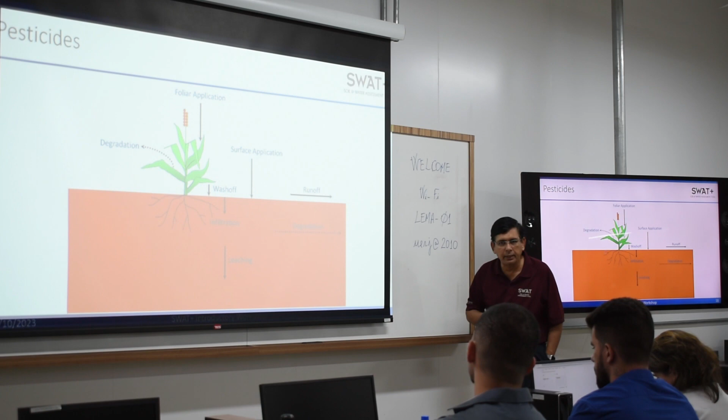Based on the pesticide that's applied, it can degrade or wash off into the ground, and that can infiltrate and leach to the groundwater. Any excess pesticide can also go as surface runoff and sediment. So SWAT has a very detailed pesticide simulation process to capture all the pesticide movement.

What are some of the land management practices you can simulate? You can simulate crop rotations, meaning different crops in different years, or two crops in the same year, like a summer crop and a winter crop. You can also have different tillage operations, controlling how deep you disturb the soil. You can have different fertilizer applications — automatic fertilizer application, manure application, time and season-based application, or continuous fertilizer application. Every time you irrigate, you can also apply fertilizer automatically.

You can also simulate grazing, land grazing for animals, and pesticides. For irrigation, you can have any source of water — pond, groundwater, surface water, lakes, deep aquifer, or water transported from another basin. So the source of water can be defined.

You can also have a tile drain system. I don't know how much tile drain is practiced here. Tile drains are artificial pipelines under the ground to remove excess moisture. In the US, because of the snow, during winter the soil is completely saturated, and you can't take your tractor into the field unless you drain the water. So they install these tiles or perforated pipes under the ground to remove moisture, allowing tractors into the field to plant crops.

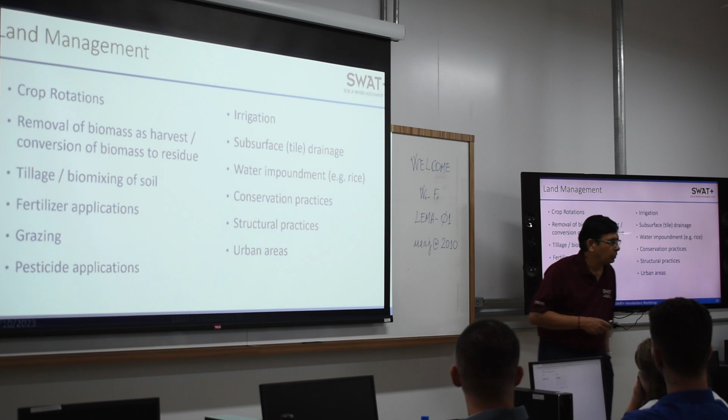The next topic is the in-stream process — how do we simulate it? So far everything discussed was on the landscape, the overland process. Once all the output from the overland process is combined by HRUs, it's dumped into the river, and any point source from industry or municipality also joins in. Then, along the length of the river, we look at the dilution, the diffusion, and the decomposition of the various chemical properties.

We use a simple steady state model for this. It is not a hydrodynamic model, but SWAT has been linked with hydrodynamic models like WASP or CE-QUAL-W2, which are public domain open source models. So if you're more interested in the hydrodynamic component along the river, there are other models you can link up with SWAT output. SWAT itself uses a very simplified steady state model.

Okay, so what do we do? We look at the flood routing, how much the water moves through the system, how much water evaporates, how much is the transmission loss at the bottom of the channel. And down cutting and widening, meaning the dynamic part of the thing. So for example, you may have erosion coming from upstream, coming and settling, and that changes the depth of the river. Or you may have bank erosion that's going to widen the river. So the model is able to calculate the down cutting and widening of the river.

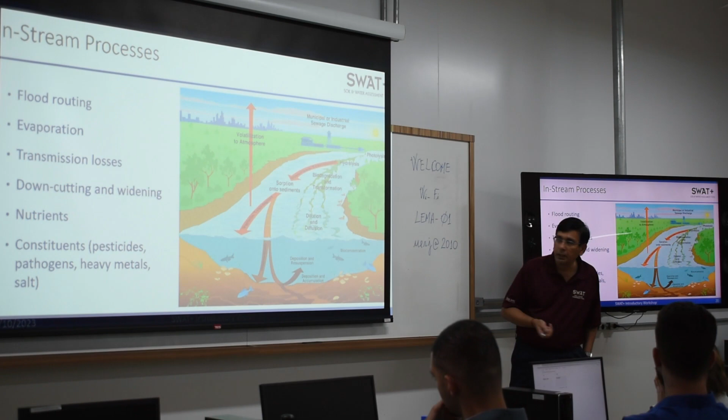So in the in-stream nutrient, we look at what's coming from the upstream sub-watershed. We keep track of 4 forms of nitrogen: organic nitrogen, nitrate, nitrite, ammonia. We also have 2 forms of phosphorus, organic phosphorus and soluble phosphorus. And we have 2 forms of oxygen, carbonaceous oxygen demand and dissolved oxygen, and 2 forms of biology, meaning chlorophyll and algae. So this is what we keep track of in the river, reach by reach or subbasin by subbasin.

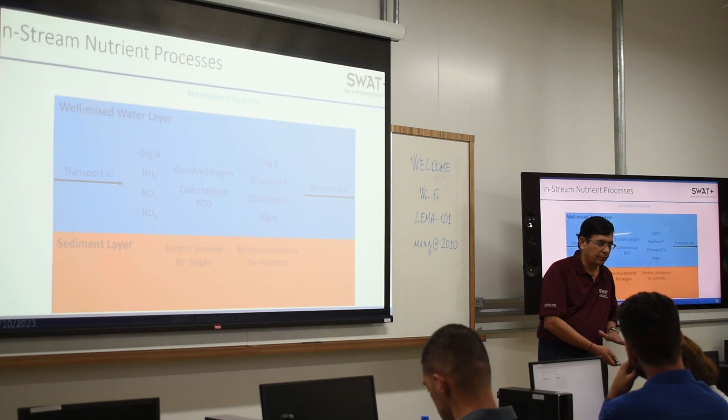We have a water column and a sediment column at the bottom of the river. The sediment layer can be a sink or a source. If there is erosion, it becomes a source. When there is settlement, it becomes a sink. So it can either remove nutrients or add nutrients back to the river, depending on the velocity of the flow. If it's a flood event, it can contribute. In a normal laminar flow, when the flow is very small and undisturbed, it can settle like a basin.

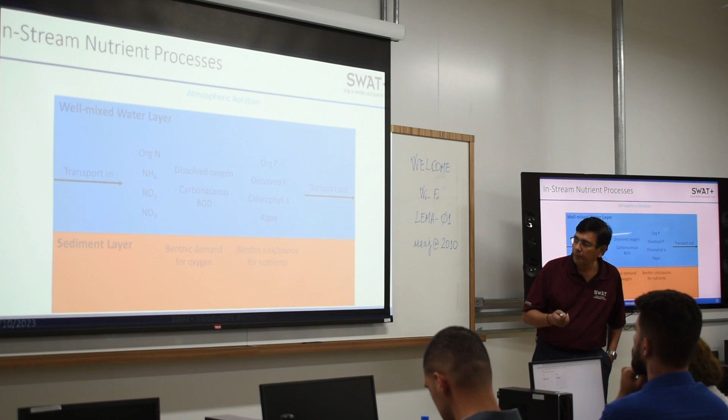As far as the impoundment, meaning water structures like ponds, wetlands, dams, lakes, or reservoirs, you can simulate that. We know how much inflow is coming into the water body, how much evaporation from the lake, how much is the seepage loss. If you have any kind of water withdrawal, you can implement that, how much water you are removing from the lake for irrigation, water supply, or industrial supply, and things like that. And then you can also control your outflow, how much water you want to release downstream, and when you want to release it, you can control all that with the reservoir module.

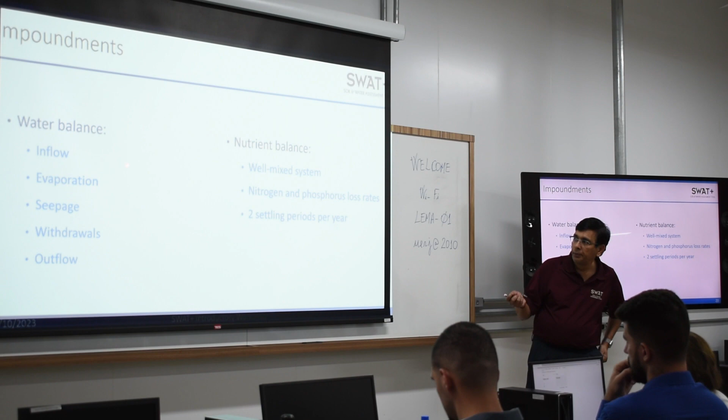The nutrient model is very simple in SWAT today. So if your ultimate goal is to analyze lake water quality, SWAT may not be the best model for that; there are other models better suited for that. You can still use SWAT for the landscape part. Once the water comes into the lake, there's a much more sophisticated lake model, like CE-QUAL-W2, that we have linked. You can easily generate the input that goes into that model, and then run it to look at what's happening inside the lake, because inside the lake we keep it very simple—like a big bathtub where everything gets mixed and settles in a simple one-dimensional model. It is not a two-dimensional model.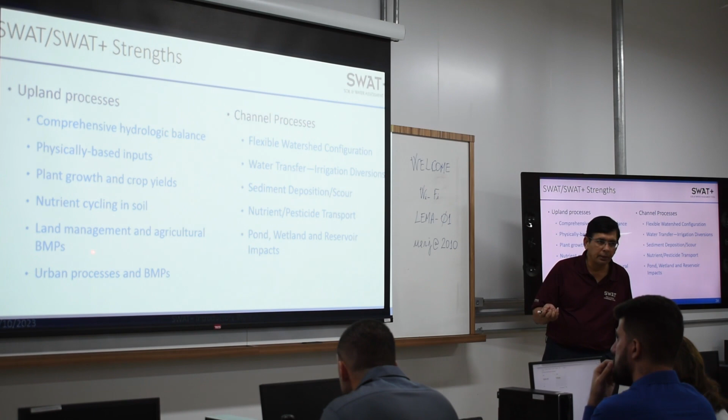The major strength of the SWAT model is the upland process, where we have a comprehensive, hydrologic balance using physically based inputs that include plant growth and crop yield, nutrient cycling, land management, and agricultural conservation practices, urban process, and BMPs are also included. It is very flexible in the way you want to configure your watershed. You can have water transfers, irrigation diversions, sedimentation, deposition and scouring, nutrient and pesticide transport, and pond, wetland, and reservoir impacts can be studied. That's in a nutshell what the SWAT model is all about.

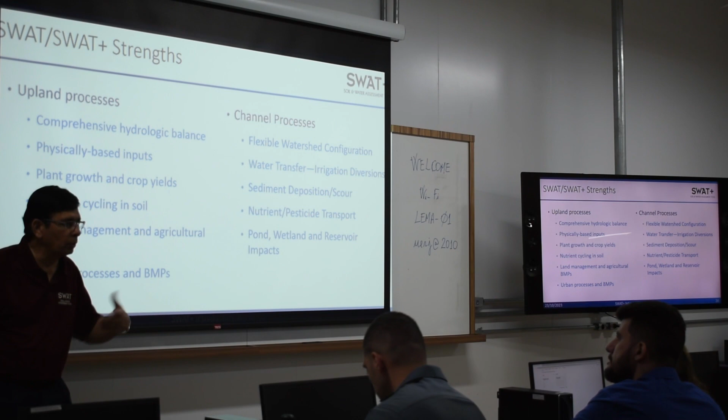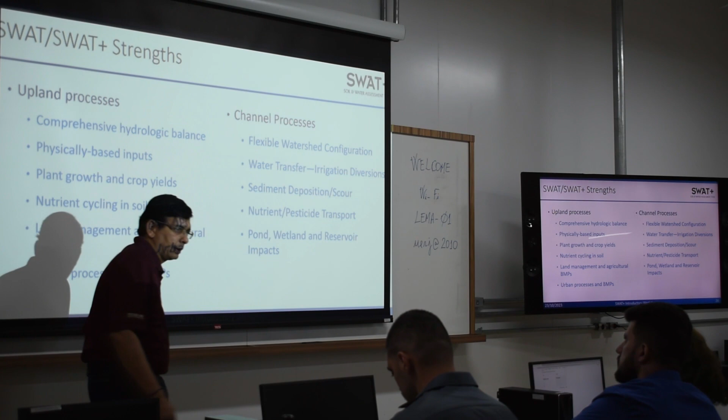Most of these vegetations are already published in literature. So if it is corn, it is the same corn whether it's in Brazil or in the US. Only the length of growth may differ. Here you may take 6 months to grow corn, or 4 months. There they can grow it in 90 days because of hybrid varieties. But the corn is still the same corn. So SWAT has a lot of this stuff tested already around the world, and we can continue to improve that and help you parameterize it according to your local situation.

Any other questions? Okay.

I want to talk about the difference between those who have used SWAT versus SWAT Plus in the next 10 minutes or so. In the current SWAT, you have a watershed, that watershed divided into sub-watersheds, and the sub-watershed divided into HRUs. That's it. This is what the current SWAT is.

In SWAT Plus, what we are doing is taking the same watershed and dividing it into sub-basins. After that, within the sub-basin, you can have water area separated from land area. And within the land area, you can also have landscape units. Landscape unit means upland and lowland, okay, riparian land or floodplain and upland as two separate components. Previously we did not have that at all - all HRUs were mixed together within the sub-basin. Now it can be separated out, and within the landscape unit, you can have HRUs.

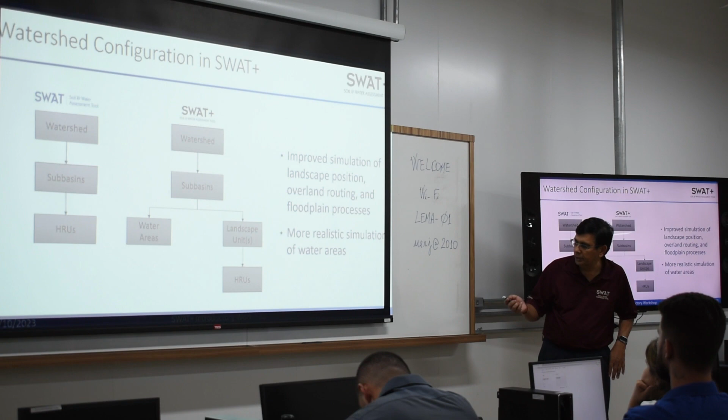Why do we do that? By doing this, you are able to account for - remember previously the HRU close to the river and the HRU in the upland were all a single unit, right? Now they can be separated out. So it's more realistic in the simulation of water areas and land areas.

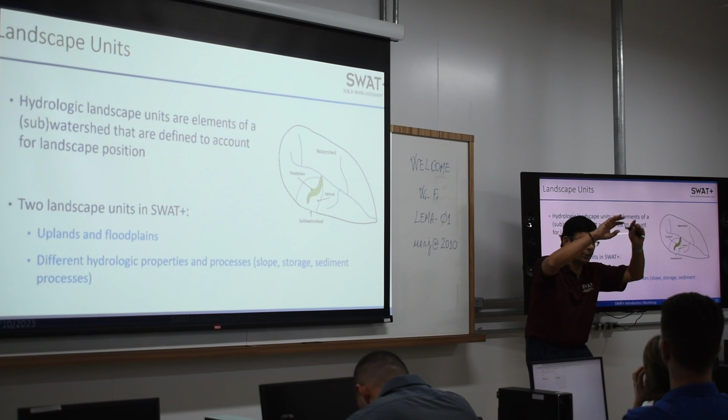So you can go ahead and simulate as much as 1 square kilometer. The first order stream, second order stream, third order stream will all be simulated. Only the HRU within the first order streams will contribute to the first order stream. There is no mixing - taking HRU here and HRU here - they both contribute at the same time, no longer like in SWAT Classic. So you can keep them separate.

So there's the upland process and the lowland process - lowland meaning floodplain.

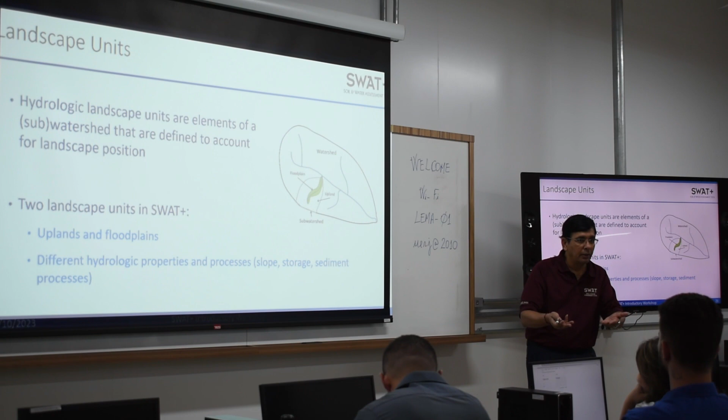Yes, some papers work with recharge areas - that depends on your areas. It depends on your groundwater, meaning below the root zone, the vadose zone, or the unsaturated zone. If it's a karst area, you may have more recharge, whereas as you go downstream here, this could be contributing back to the river. So sometimes the groundwater brings water back to the river, and in other places the water goes directly to the groundwater. It all depends on your soil properties and groundwater properties.

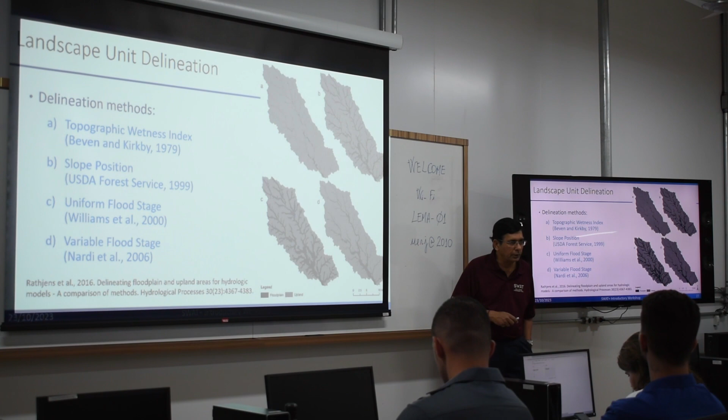Okay, so we are making it more spatially explicit in terms of hydrology. Previously, you could have only one lake per sub-basin. Now there's no limitation, you can have as many lakes or ponds in a sub-basin. Previously, the lakes could only be at the outlet of the sub-basin. Now they can be anywhere in the watershed. There's a lot of limitation that we had in the current SWAT, and we are overcoming that as much as possible in SWAT Plus.

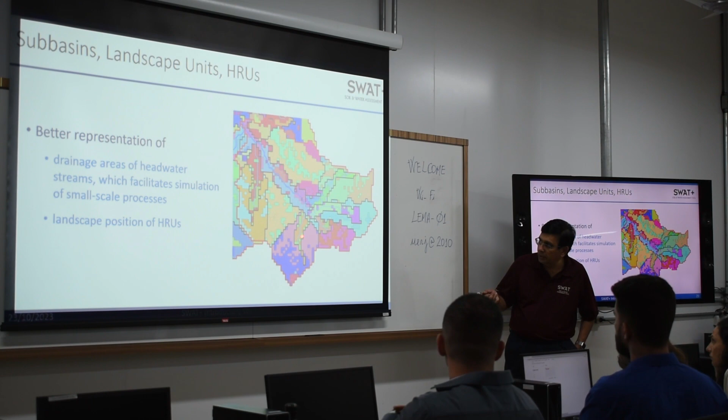So again, I know it's not very clear, but if you look here, this is the main river, and these are the tributary rivers within the same sub-basin. That means an HRU here can only contribute to this river. So the HRU here cannot contribute to this one because it can only contribute to this tributary river. That is a significant improvement compared to what we had before.

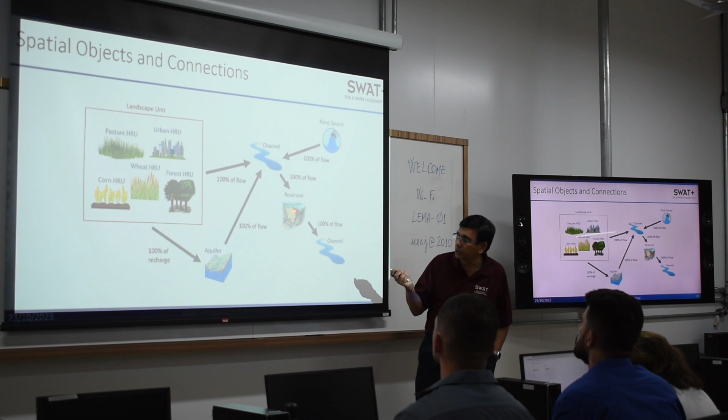Another important thing in SWAT Plus is you can send water from any HRU to any HRU, or from HRU to the river, or from river to the reservoir to the groundwater. So absolutely there is no more limitation in terms of how you want to send the flow between the different objects within SWAT. Let me explain in the next slide.

And the water can contribute to the aquifer. The aquifer can interact with each other also, and then that can interact with the river. I know it looks very complex, but it is all completely automated with the GIS interface for you. And you can always override or change the fraction of the input that goes into various connectivity. It's called the LSU connection file, reservoir connection file, aquifer connection file, and channel connection file. So we have 4 different connections across the different components.

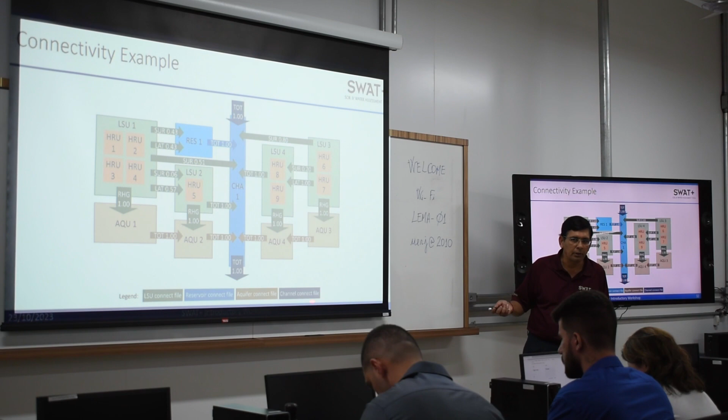I don't want to go here. So this is an example of what we cannot do before, now we can do in SWAT Plus. Previously we used to have the reservoir only at the outlet of the sub-basin. You no longer require that. Previously you could have only 1 reservoir per sub-basin, now the same reservoir can be in multiple sub-basins.

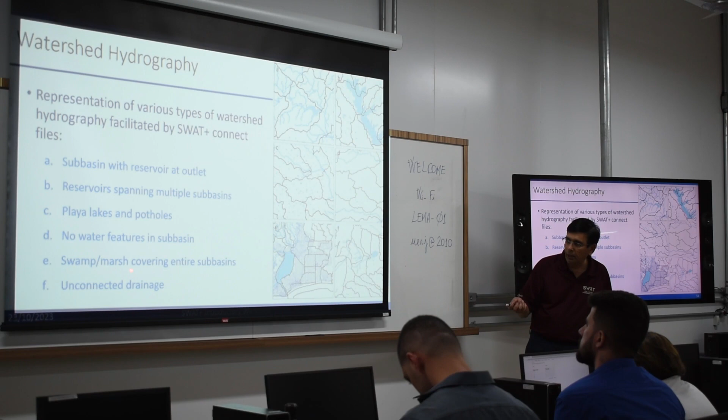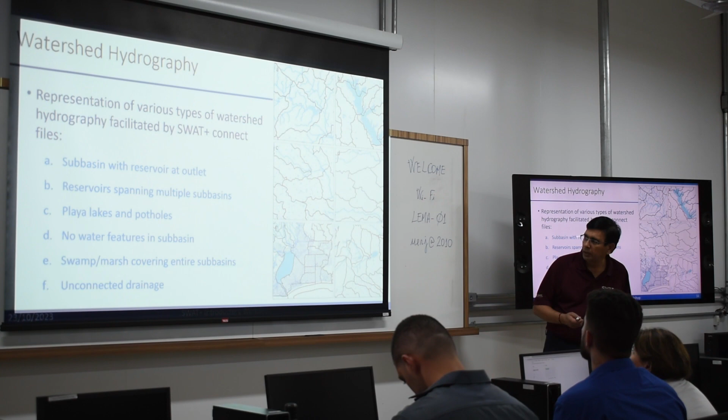I think there will be one more slide. I think this is it, I'll stop right here. I think I already talked about the channel down-cutting and widening and things like that. But in a nutshell, SWAT Plus is going to be much better, but it's not quite ready yet, meaning the hydrology is completed, the sedimentation is completed, the plant growth is completed. We are still working on nitrogen, phosphorus, pesticides, metals, and salt. Those are all the new components we are adding that are still under development. So if you're interested only in hydrology, SWAT Plus is ready for now. But if you're interested in water quality, I would wait some more time before it's ready for water quality. Thank you.